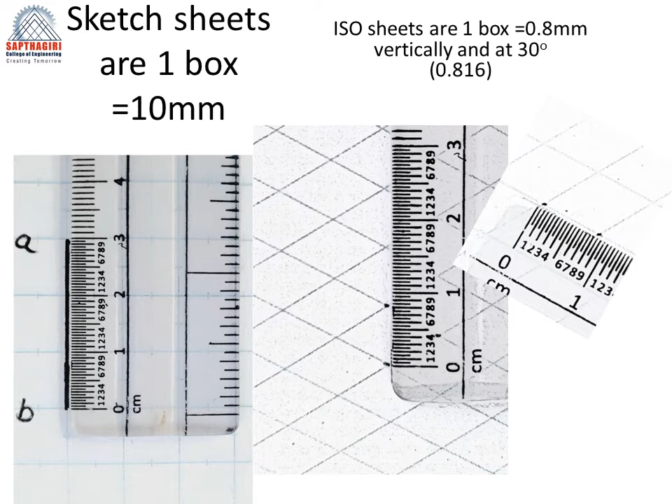As we all know, one box is 10 mm, so to draw 30 mm we just have to draw 3 boxes. Similarly, in ISO sheets, for isometric drawing, one box for a 30-degree line vertically, and at a 30-degree line one box is equal to approximately 0.8 millimeters. Actually it is 0.816 mm, but approximately 0.8, and one box can be clearly seen for ISO type of sheets where you are using it for isometric drawings.

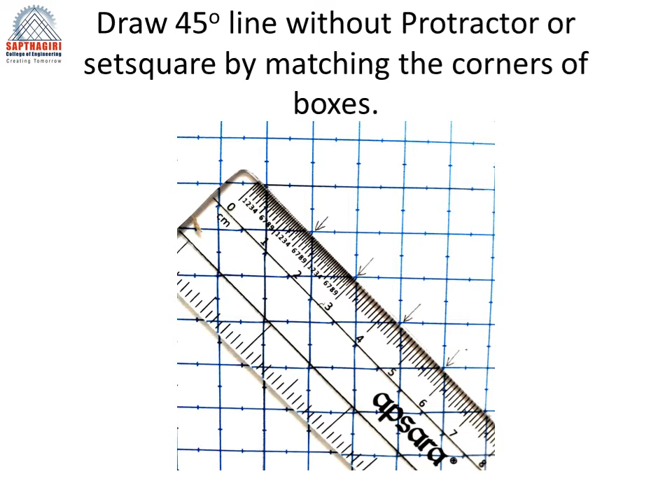And to draw a 45-degree line you need not use any protractor or any other tools. Directly identify the corners of the boxes printed in your sketchbook, take a scale, match those boxes, and directly draw a 45-degree line. This reduces a lot of time. Instead of using a protractor, you can draw a 45-degree line within some seconds.

So similarly there are two types of set squares. You may not have used them. The 30-degree, 60-degree set square and the 45-degree set square. So here is an example where the 30-degree set square can be used. So instead of using a protractor, marking 30 degrees and drawing it for whatever dimensions are required, you can directly use the set square at every position.

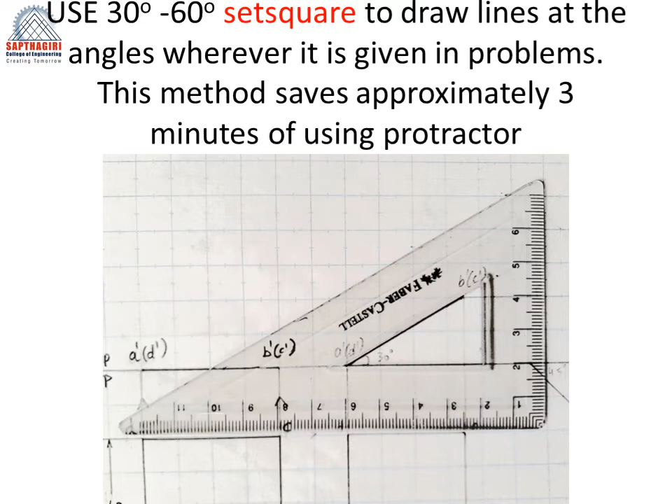So for example, 30 degrees in VP can be represented like this, and similarly 30 degrees on HP can be drawn like this. And similarly, wherever you need, a 30-degree line can be identified like this, and mark 30 degrees inside or outside of the set square, on the outside surface of the set square, at any other place.

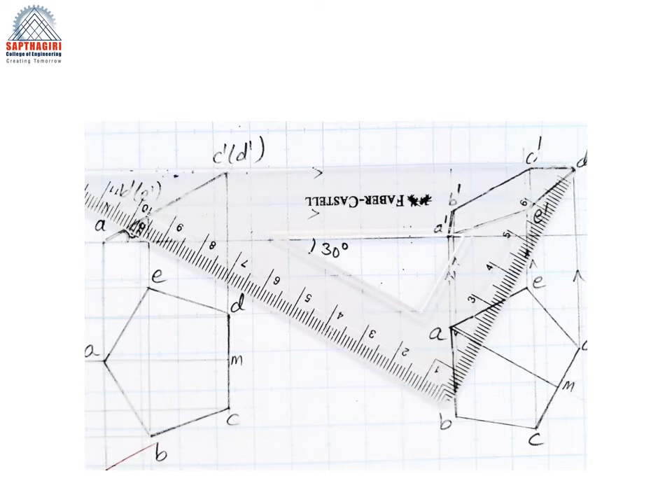So as we all know, the other angle is obviously 60 degrees. So you can use 60 degrees wherever it is necessary. So use the set square and reduce the amount of time. For example, here constructing the pentagon in VP, you can use 60 degrees directly. Just an example to use the set square at the inner slot or the outer surface.

So dimensioning is very important. So here 20 and 15 are dimensioned on the same line. It will be convenient for the examiners to look at the drawing, and it is a simple representation to mention the dimensions on the printed line. It looks good, and you can follow the method.

20 and 15 are on the same line, and similarly dimensions can be placed, and XY, VP, HP, X1Y1, everything will be in capital letters, and the name annotations like A-A, P-P or any other names will be in small letters. Very important. Let the dimensions be at one box gap, that is approximately 10 mm, and draw the dimensions. So the dimensioning line is broken in between to follow the unidirectional system.